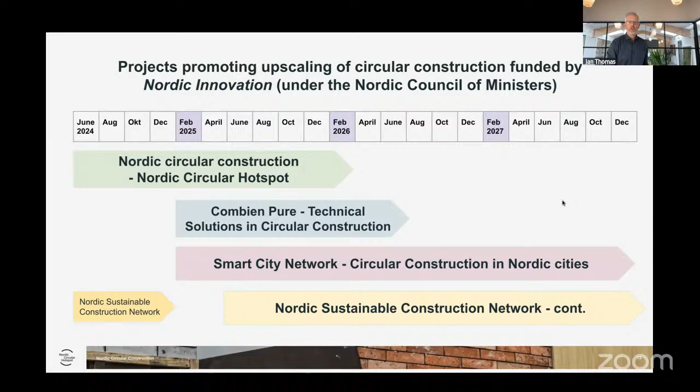So, hold on, it jumps ahead.

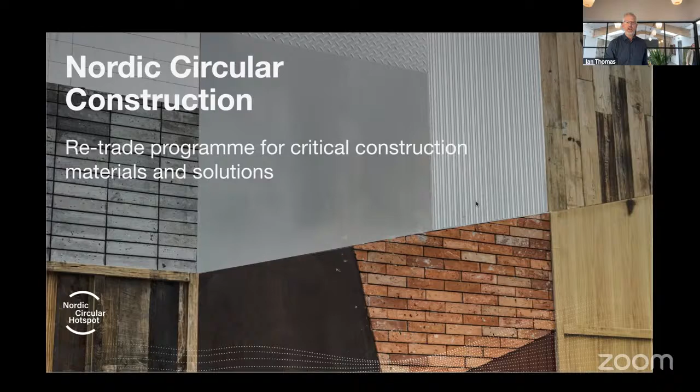I will say a few words about our Nordic Circular Construction project. This project started last year, and we're now about halfway. We are assuming several things in this project. The aim is to scale up circular solutions in the construction sector in the Nordics, supporting companies succeeding in one country to scale up to another. We assume viable circular solutions already exist, we don't need to innovate so much more, we need to scale them up to get the sustainability dividends of circularity.

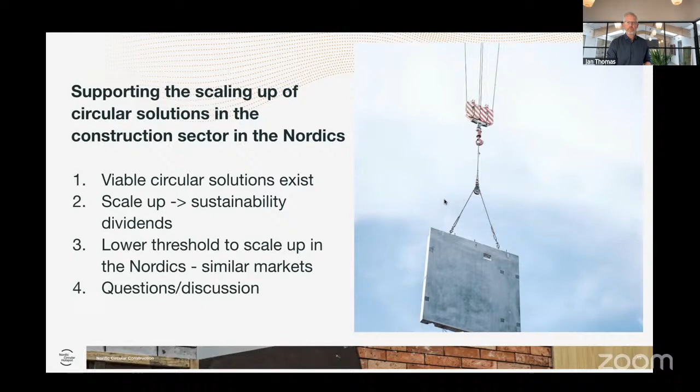We also believe it's a lower threshold for these companies to scale up in the Nordics, which are more similar markets than beyond. It's a simple 4-step process: we identify companies interested in scaling up their circular solution in the Nordics, then agree on a segment analysis of what segment and country they want to explore. If this gives necessary insight, we develop strategies with them and eventually support implementation if we get to that point. We hope they become what we call Nordic market ready.

This project also has a communication path, and this seminar is part of it. We're also on LinkedIn and our website, so you can read more there.

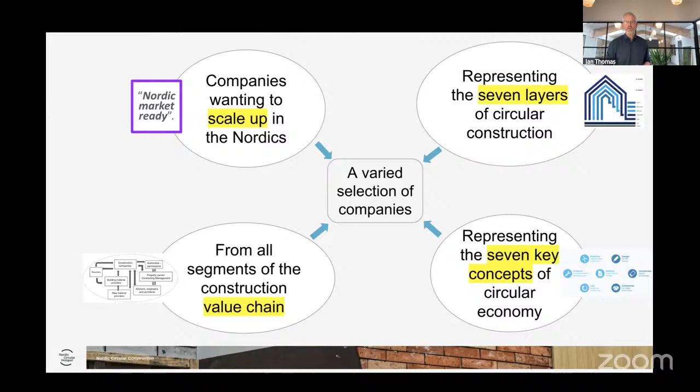The selection of companies is based on readiness to scale up in the Nordics. We want representatives from all segments of the value chain, the 7 layers of circular construction, and the 7 concepts. We identified about 130 companies, and out of these we want 15 to 20 to participate. We're now at 14 companies on board. Norway has the longest participation list, with several from Denmark and Sweden, plus Iceland and Finland present, though we still need to recruit more there. We're very happy we got this far.

What we see is that all these companies have really tested circular solutions with very big potential. They are truly circular, not just in design but also in how they're used - you can change and reuse them after their first usage. We have most key materials represented, most segments of the value chain, and also most of the layers.

This project also aims to learn about the state of circular construction in the Nordics, to get insights, and to try to influence governments on policy.

So the insights so far, to be brief: we still see that the linear lock-in fuels market skepticism. You can have brilliant solutions, but the very conservative construction business says it's better with my old solution. We see that it also takes more years for circular solutions to penetrate the market than more traditional products. What everyone is asking for is some willpower - willpower from decision makers, be it architects, builders, entrepreneurs, or building owners. They need to take the step, take a chance, and try these things out. Otherwise, we won't get the circularity.

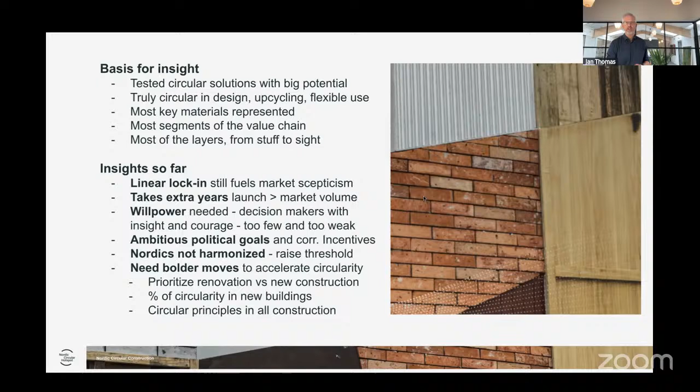So with this, I want to introduce 4 of the companies who are participating in this program. They will give you a brief insight into what they do, what they're trying to achieve, and some of their challenges.

We are going to start in Finland with a very innovative company called Carbonaide. This is actually one of the first things they produce: a piece of street stone which has been carbonized. So to explain how this is circular and how this works, we have invited in Jonne Hirvonen.

Thank you, Jonne Hirvonen, Chief Operating Officer and co-founder of Carbonaide. We are a technology provider for the concrete industry, focusing on precast concrete. It's good to mention that precast concrete is a big enabler for low carbon concrete and circularity, because reusing construction parts is much easier with precasted products, and we are the best in Nordic countries for that.

Our solution has been developed at the VTT Technical Research Center of Finland since 2019, and we have been working as an independent company for plus 2 years, commercializing our technology. Now we are good to go for markets outside Finland. We have one user in here already.

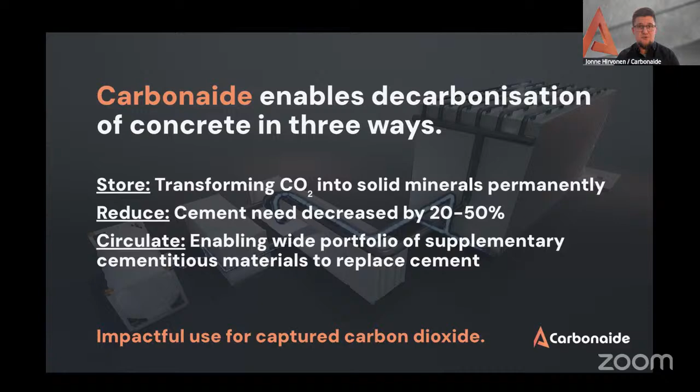Do you have another slide in there? Hold on. Yes.

I wanted to give you one call for action: we see that utilization already drives the change because cement pricing is going up. That's not great news for the industry in a way, but it will drive the green transition in the construction sector quite a lot. So savings of cement might be a good business case for us in the beginning, but there must still be a stable way to valorize the negative emissions we can generate. This is a call for action for everyone here: let's use the potential of the built environment to do it. Thank you.

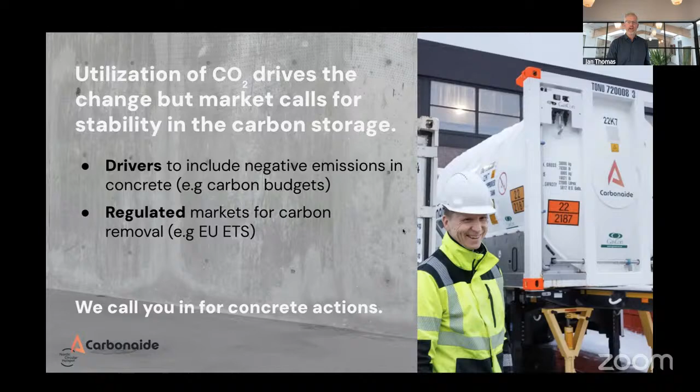Thank you so much, Jonne. We will get back to you for a brief debate afterwards on maybe some common challenges between the companies.

So then we are going to turn to a Swedish company called Bruksspecialisten. They are experts in reusing tiles and renovation. I'm going to let the CEO, Jakob Sten, tell us a little bit about it.

Hi, nice to be here. I tried to take control of the presentation. Is that okay? No? Yeah, what happened? Not really sure. So now try. We'll try. You have the control. Yeah, I don't see the small dots, but it's okay. You may help me, Jan.

I'm Jakob Sten, CEO of the Swedish company Bruksspecialisten. We're a specialist in masonry and plaster construction, focusing on materials: bricks and plasters. We're located in the three biggest cities here in Sweden: Stockholm, Gothenburg, and Malmö.

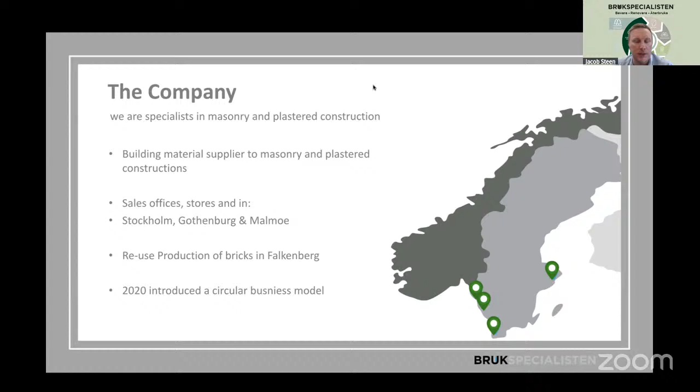We opened up reuse production of bricks in 2020, and that's also the year we introduced a circular business model in the company. If you take the next slide there, Jan.

Today we work in three different business areas to ensure our materials are in the loop. Our biggest and most important area is to preserve and renovate already built buildings with bricks and plastering systems, helping property owners keep buildings and prolong their lifespan.

When you can't prolong the lifespan anymore, we have a reuse system to collect demolition bricks and make them ready for another life in new projects. And the last area is circular products, where we've focused on using reused bricks and unburned clay as nice circular products in new projects.

And if we take a look into one of those materials, let's make the next slide there, Jan.

If you look at the reused brick as a circular product in a building system, our system here in Sweden is the first large-scale reuse production to recover demolition bricks, and it's a CE certified production. That's quite unique.

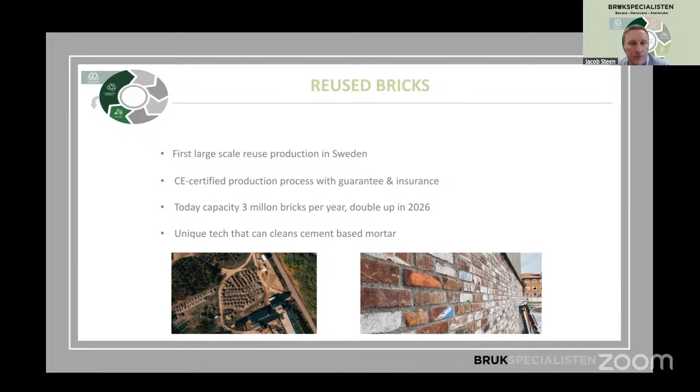If we look at the last slide here, from these demolition bricks we get different product areas. So today we have the facade brick, that is our most popular product, but we also make the brick slip that you could make into precast walls or glue on internal walls.

And new for this year is the flooring system, where we cut the floor tiles from full bricks. That's an interesting way to scale up the demolition waste from bricks as well. So that's a short introduction from our side.

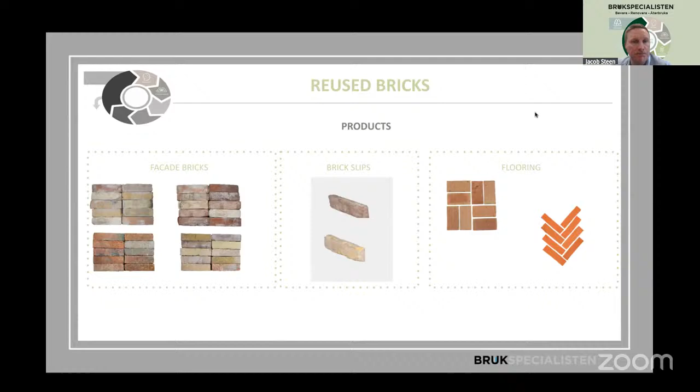Thank you so much, Jacob. I think this technology to clean the bricks is one of the possible breakthroughs, because that's been one of the big challenges. But now we're going to look at another material, which is wood from old buildings.

And with us we have the CEO of the Danish company Næste, and he's going to tell us how they use wood from construction and give it new life. Go ahead, thank you, Niels.

Thank you very much. My name is Niels Andersen. I'm trained as an architect and now CEO of Næste. We are 20 people in our production in Denmark. We produce sheds from waste materials.

I think this is not the first slide, but we could begin here. Yes, so in Denmark we have at least 100,000 tons of wood that should be and could be reused. This is only like 1/4 of the total fraction of clean wood in Denmark. I believe the numbers are really much higher in the rest of the Nordic, but these are the Danish numbers.

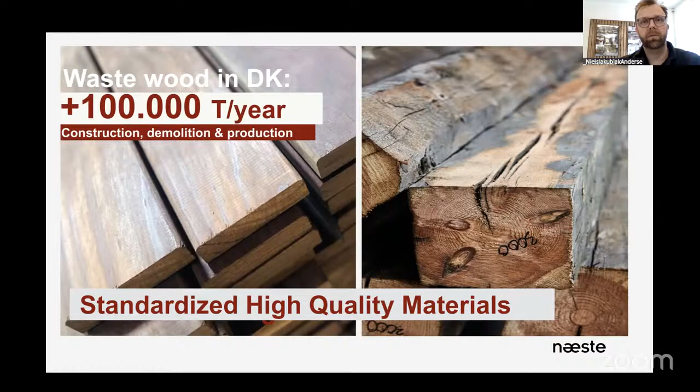And these materials are really high quality, and should be reused - old timber and also discharged wood from the factories. If you could change the slide again.

So we unite those two waste streams and we build these sheds. And with sheds we mean like unheated storage space, secondary buildings for waste handling or for bicycles and storage, among other things. And we found that in Denmark we actually build yearly 500,000 square meters of sheds.

And if we combine those two numbers, this number of sheds and also the volumes, it more or less adds up. So in essence, we could remove the problem with the waste wood in Denmark if we were to build all sheds from waste wood.

We have certified our production with FSC, and we're also documenting the DGNB points that are commonly used in Denmark. And we have certified our company as a B Corp corporation. If you could take the last slide, Jan Thomas.

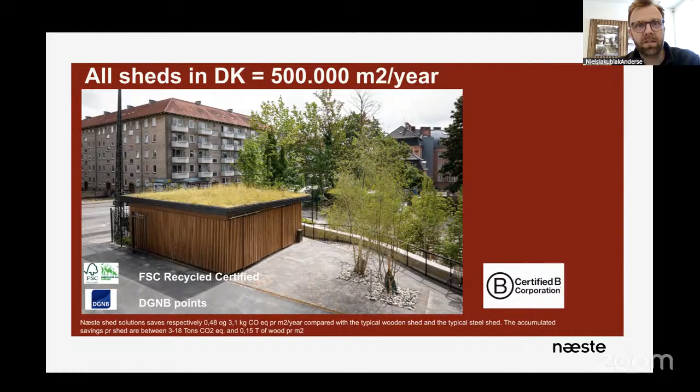I tried to sum up the challenges that we see, barriers for scaling. First of all, we meet one problem, and that is the virgin materials that are presently not priced to the actual footprint. So that means it's hard to compete with too cheap virgin materials, so to speak.

We have a lack of regional circular value or resource chains in order to secure deliveries in scale. We have a present focus in the building industry in Denmark, and I'm sure in the rest of the Nordic, on initial costs rather than the total cost of ownership or product as a service solutions.

And I would really urge us to also focus on this, because it kind of moves the customer to a different way of thinking when we start thinking about total cost of ownership. And it also moves us into a regime of quality thinking, lifetime thinking.

We need more legislative changes in Denmark. We just are implementing now this rule of selective demolition, demanding the demolition companies to take out materials that can be reused and actually document that they're reused.

But we need much more than that. We also need a differentiated quality documentation and more. Then we need some financing of systems for the shared risk across the sectors.

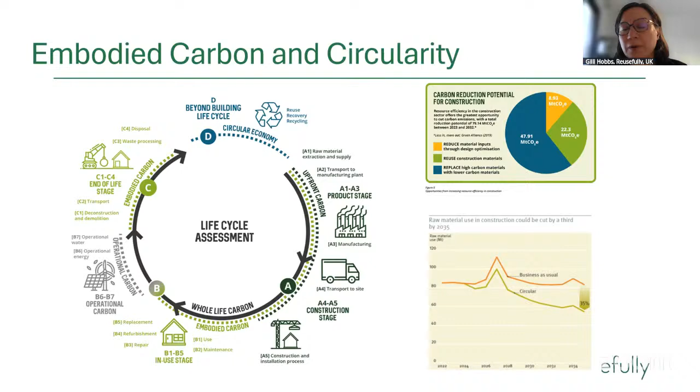Another key driver links to embodied carbon, carbon emissions, and how do we use circularity to reduce carbon emissions, particularly whole life carbon emissions. This is an area where there's a lot to play for in terms of circularity. If we can reduce the amount of materials and new products we use, and keep them in place longer, have more adaptable, longer lived assets, that's good for whole life carbon. But also if we can extract products from the existing built environment and reuse them, we can significantly reduce the upfront carbon of new development. So that's another big driver for circularity in the built environment.

I'm sure you're all aware of this. Five years ago, there was the Circular Economy Action Plan published for the EU, again linked to the fact that it is a key sector in terms of resource extraction, waste production, and carbon emissions. I've just highlighted some of the targets and objectives laid out 5 years ago, to show that there has actually been quite a lot of progress in terms of taking forward circularity at a regulatory level across the EU.

So I'm going to talk a little bit about the construction products regulation and also levels. What may not have hit the headlines yet is the fact there's a new Circular Economy Act that's planned for the latter part of 2026.

This was announced in the Clean Industrial Deal. So there's going to be much more emphasis, it's only scaling up, only going in one direction - we really do need to accelerate circularity within the built environment. There's a target in the Clean Industrial Deal to have 24% of materials circular by 2030. What that means isn't really defined, but it's very likely to involve greater levels of reuse, and also higher value recycling, so much less downcycling than we're getting at the moment.

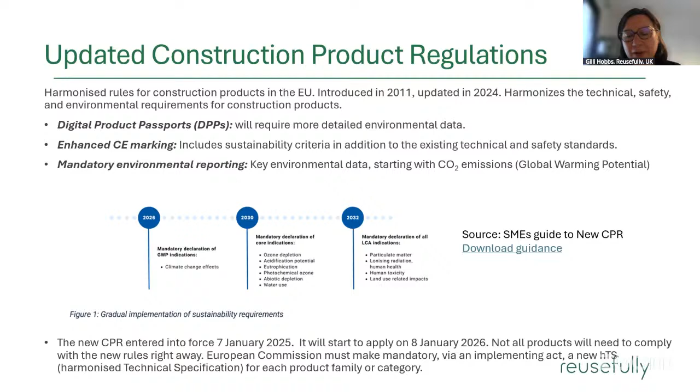The new CPR will actually start to apply from January next year. I think this is where there's a really important link to standards, because it can only really be enforced where there's a standard or harmonized technical specification that can be brought into place. For example, the environmental indicators on this figure - many of those already had a standard in terms of EN 15804, so that's fine. But there'll be many other areas where a standard or technical specification needs to be developed to enable that to become mandatory via an implementing act. So this is the link between the regulations and the development of standards.

Another area is Levels - the Commission developed a sustainability standard for buildings. There are six macro objectives, and the one we particularly look at is macro objective number 2, which relates to circularity, but also macro objective 5 is quite relevant because it's looking at the ability to adapt and be resilient. Also relevant is macro objective 6, which is basically whole life costing - looking at the various risks and rewards across the whole life from a financial perspective. The reason I put this up is because Levels is referenced in a lot of the various regulations and policy development, particularly in relation to green public procurement and sustainable finance. This is an important standard to be aware of if you haven't looked at it already, and to understand the various indicators and how they are measured, what the methodologies are behind measurement of those indicators.

Another document also referenced in procurement and the EU taxonomy is the guidance in relation to construction and demolition waste management. This was actually updated in August last year and now includes guidelines for pre-demolition and pre-renovation audits, and it's got some really good stuff in there, so if you haven't read that document I would suggest having a look at it. The work we were doing in the standards committees fed into the updating of this protocol. It's not mandatory, it's voluntary guidance, but it does become mandatory when it's linked into the procurement and taxonomy if that's being implemented.

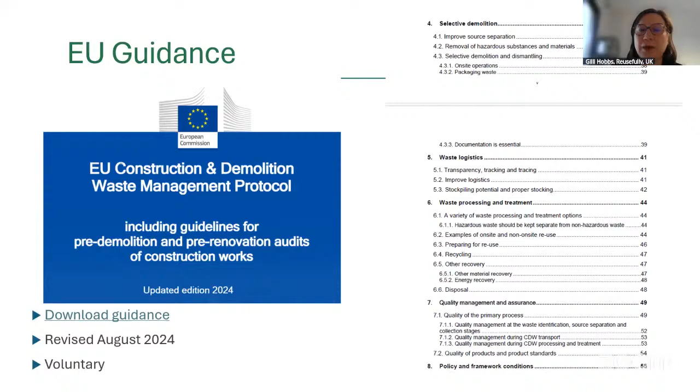And then there's the EU taxonomy, which I've referenced already.

It's again quite a new document linked to sustainable financing. There are three areas relevant in terms of built environment: construction of new buildings, renovation of existing buildings, and demolition and wrecking of buildings and other structures.

Within this are substantial contribution criteria for transition to circular economy for new buildings. It references levels, as we've just had a look at, and the EU C&D Waste Management Protocol, but it also sets targets for limiting the amount of primary raw material use, differing depending on the actual material.

On the inert side of things - concrete, brick, and insulation - there are maximum levels of 70%, going down to quite a low level for metals. That's not surprising, because metals already have a fairly high recycled content.

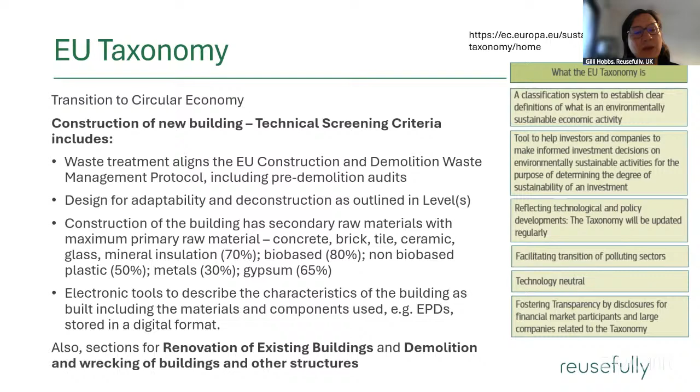But then also looking at the tools to characterize and measure performance, there's a big shift and push towards digitalization of the information we need in order to transition to the circular economy.

I haven't got much time, so I'm just going to whiz through the last few slides before I get my one minute, which is probably... I'll give you one more minute to wrap it up, Gilli. Is that fine with you? I think I can share this presentation afterwards.

There are some links here, to any of these research projects you're not aware of or haven't looked at in detail - this is just a snapshot. There's a lot going on in terms of R&D, and some very good information already available.

For example, the City Loops project or the FCRBE, which has a material reuse toolkit. Then there are ones underway, like ReCreate on the reuse of concrete, and a whole raft of other projects being developed. A recent call that closed in February looks at things like design for adaptability, reuse and deconstruction, so there'll be a whole suite of other projects developing from that.

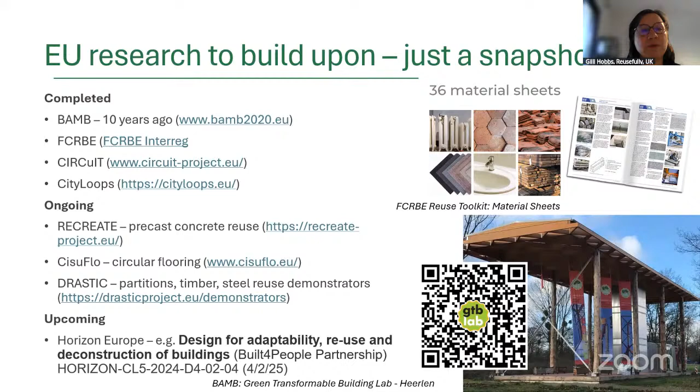I'm just going to finish quickly on the standards. There's a European Standards Committee, CEN/TC 350 SC1, Circular Economy in Construction. We now have draft principles outlining the scope and objectives of moving towards circular economy in the construction sector, establishing principles of loops and different objectives and approaches within that.

There are now working groups developing standards. The most advanced relates to framework principles and definitions - there's now a draft being circulated, so hopefully we'll have the first standard published by the end of this year.

Time will tell. More recently, five working groups have been set up to look at important issues relating to harmonisation and circularity: working group 4 on data, working group 5 on assessing circularity performance, working group 6 on harmonising the approach to reuse of construction products and materials, working group 7 on designing for circularity at different levels, and working group 8 on pre-demolition and pre-renovation audits and evaluation.